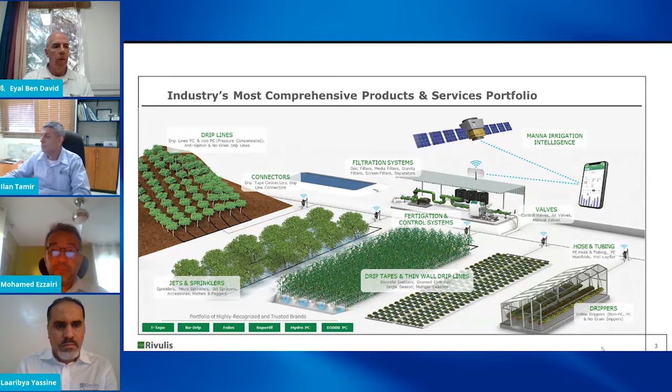The project solutions, or what we are manufacturing, are addressed to all what we call row crops, starting from orchards to vegetables, and I can add to this list most crops like alfalfa, which is more and more representing a big part of projects, or simply of drip activities in SDI.

Of course, we also do projects and have products adapted for corn and for sophisticated greenhouses or glass greenhouses in intensive agriculture. I will try to go fast and not go into too much detail in some slides, but please don't hesitate to ask a question at the end of the presentation for any detailed point concerning a specific slide.

As we said, we provide the full end-to-end design-to-harvest services. Of course, we are not providing harvest itself, but we provide technical support or supervision on how to conduct drip irrigation, irrigation schedules, and the maintenance of the material during the crop period, or even after.

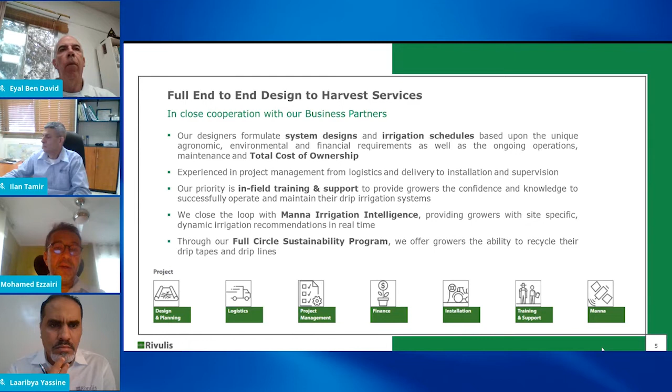Project design and planning - we design over 60,000 hectares. Of course, we design also for our partners and distributors in most cases, and we do direct turnkey projects. This concerns projects from 0.1 hectares, talking about gravity systems in some countries, or even sometimes less, to mainly - this is our business - over 500 to 1,000 hectares.

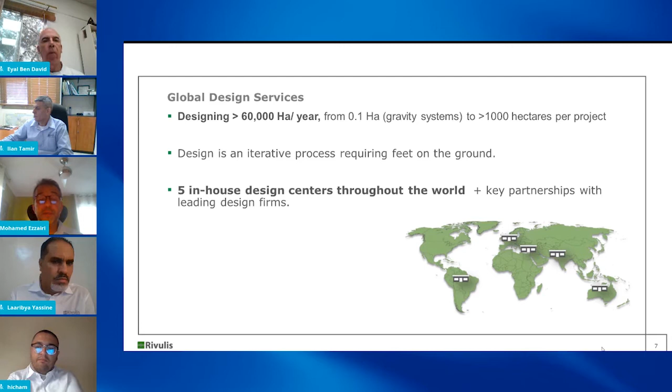We do projects up to 10,000 or 20,000 hectares in some areas, mainly sugarcane or other industrial crops. Of course, the design is done with exchange of information with our partners or our team, located in most countries, working with our design centers.

I missed one - we have 5 design centers in total: South America, Europe, Israel, India, and Australia, with thousands of designers close to our partners or close to our customers. In addition, we have what we call irrigation solution managers and agronomists also close to us, checking solutions with our partners and the end users.

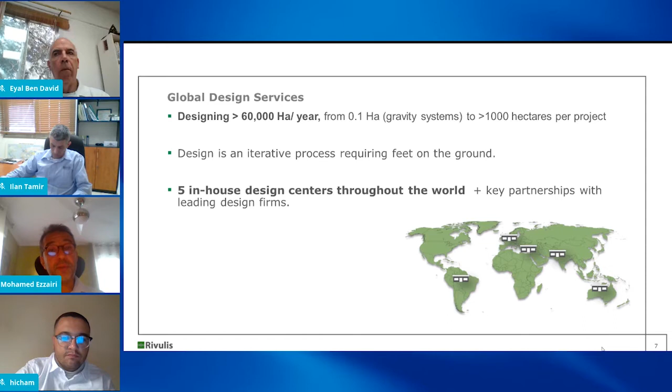So this required, to go through a successful turnkey, agronomists, hydraulic engineering, and product managers. And in some cases, not all, we provide finance, which also involves insurance and banking expertise in some complex or large projects, requiring financing from a year to 5 years in some governmental projects.

Then on-field technical support and training. We are one of the few, or even the largest, company with a very strong footprint or presence in the field. Our people are locally based in many countries, in most of the countries where we do business, and most of them provide support and training. We also have experts in our centers who train and travel to the field for sporadic training and after-sales service when needed.

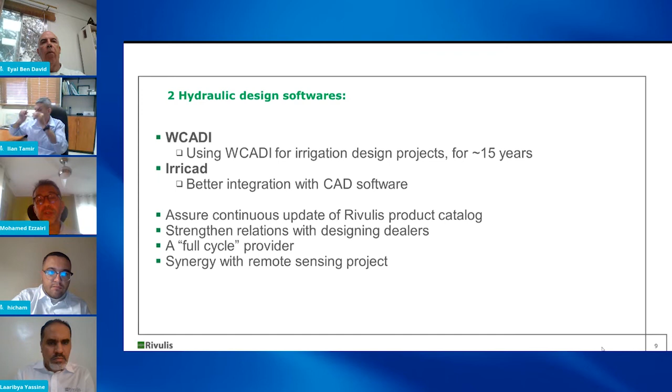About software, we won't go into details here. We work with two: WCADI and Irricad. These are the most professional software used worldwide, and of course the latest ones. They're very well integrated to make specific designs for materials like filtration, or how to manage the installation with the SDI.

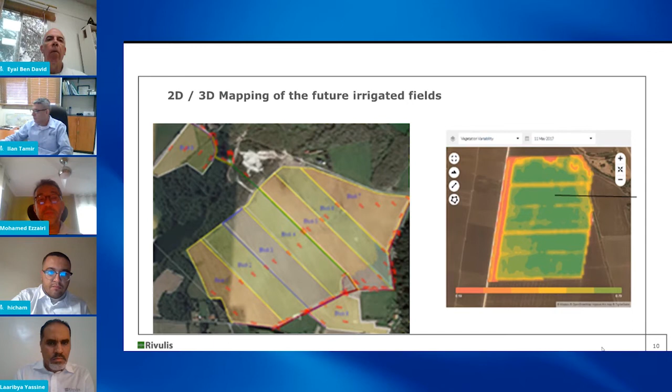If we take this map, for example, we have the hydraulic design with pipe dimensions, everything. On the right we have details of the materials and the water requirements, how to manage irrigation globally, and another map detailing the crop or irrigation management across the field, managed per sector or per block.

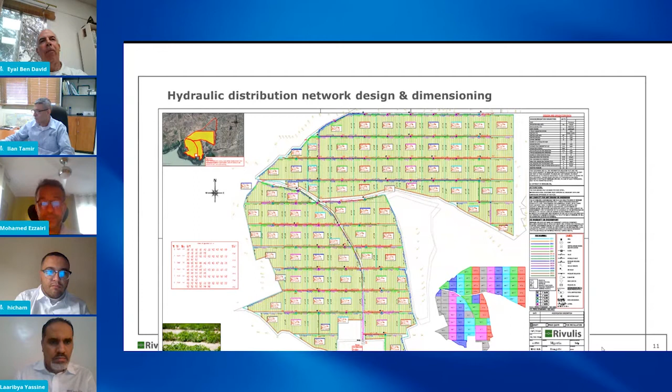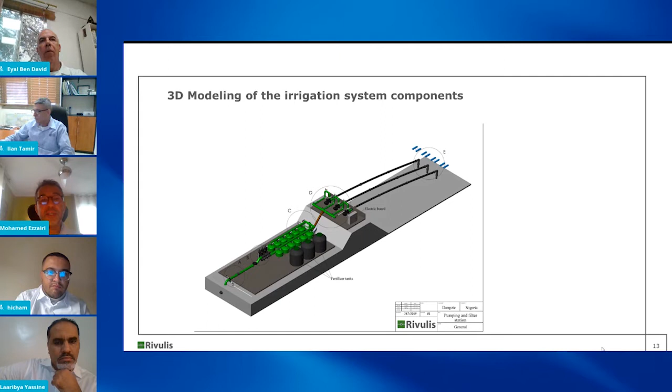At last, an example: when we have a filtration station at the head of each block or sector, we provide all the details of all components that are going to be used in the project. This step helps, generally, at the stage of installation, with the supervisor or simply with our own team during installation.

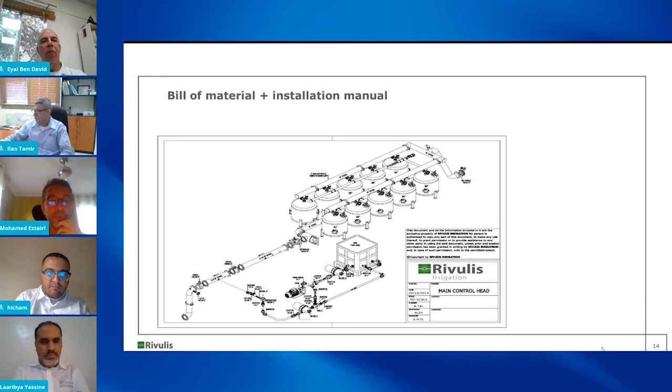I'll talk about finance, going through it fast. It's simply a kind of finance used in collaboration with an insurance company. This means that once we have the approval of the insurance company, based on financial reports, description of the project, and the pro forma invoice, this is discussed with the insurance company.

Once the insurance approves, then comes the latest stage, which is negotiating with the bank. Negotiating with the bank is actually the easiest step; the most complex part is managing to get an approved amount from the insurance company.

The key here is the collaboration and support of the end user, the customer, or the payer—providing the right documents, having sustainable activity, a good project, and visibility for the insurance to provide coverage or an amount that can be easier to negotiate with banks. With banks, we try to check with 2 or 3 banks.

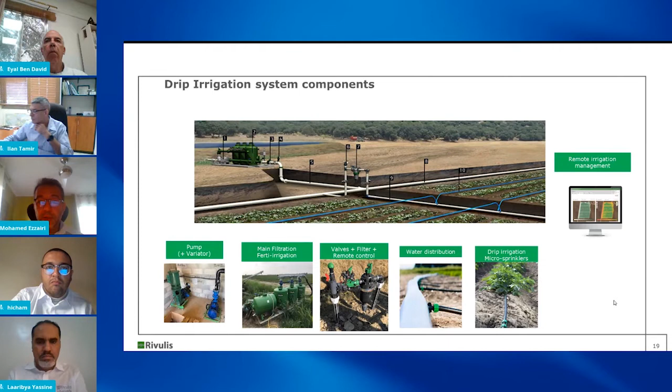So the head station or the filtration—I will not talk about pumps. As I said, pumps are the latest components that are defined from the beginning based on water availability, which can be fixed simply by the flow or the capacity of a well or a forage.

But if you go directly to the filtration, the most important part will be decided mainly by the pump's capacity, or more importantly, based on water quality. It can be mineral, or contain organic or other materials that impact the cost or quality of the filtration. As an example, if you have surface water or canal water, it's more recommended to use media plus screen filtration.

Sometimes we have what we call primary filtration at the head station, and we add secondary filtration at the field. But again, it depends on the water quality, what technique we are going to use—if it is SSDI or not—and what kind of maintenance we are going to provide.

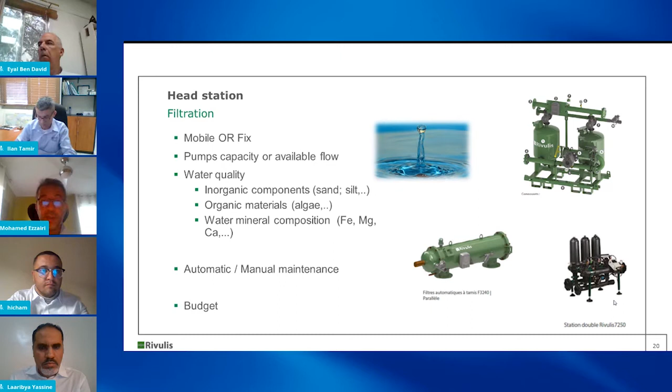Fertigation is the second part, depending on the crop, the value of the crop, and the system or technique used—whether for greenhouses or not. It starts from manual or Venturi systems, and ends with big, sophisticated fertigation machines used for greenhouses or high value crops to provide precise fertigation. Of course, we can combine both fertigation and irrigation, making everything automatic, assembled and located in one head station.

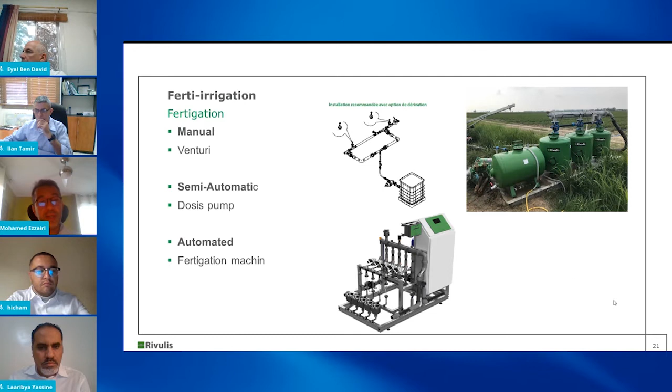Valves are the third component, coming just before the manifold or the irrigation block. We have different kinds of valves used in the field depending on the design and the constraints we face—pressure reducing valves, pressure sustaining valves, or simply on-off valves. In some cheap markets, which is not the best solution we recommend, we can also have simple manual valves, like ball valves or basic plastic valves.

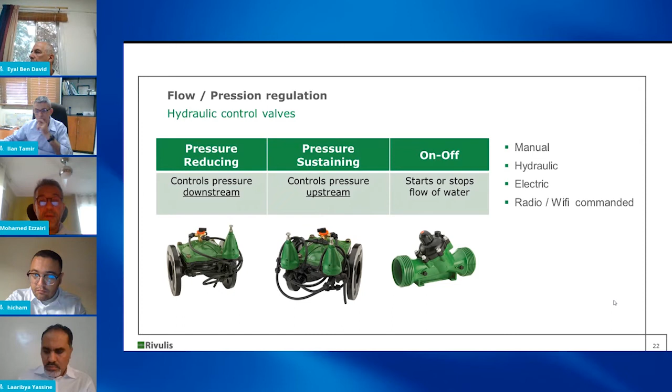Drip tape or drip line is the last component of an irrigation project. Of course, I'm not talking here about sprinkler or micro sprinkler, but it can be similar when we talk about distribution. And how to use them, or the choice of drip lines, depends on too many factors.

We will not go into details here, but just to give an idea, most systems can work for most crops, but as an example, we can technically use tape on orchards if we want—but economically it's not sustainable. This means the technical solution must fit with the economical and financial solution to make the investment sustainable and to have the right return on investment for each crop.

If we talk about vegetables, we are more willing to use drip tape, since at the end of the season we can remove and recycle the tape, avoiding the retrieval of hard drip lines to put again on another surface—which costs more at the end of the day than the cost of the drip lines during the season. This means that for every crop or cropping technique, we adapt the kind of distribution water material, drip line or drip tape, that we are going to use.

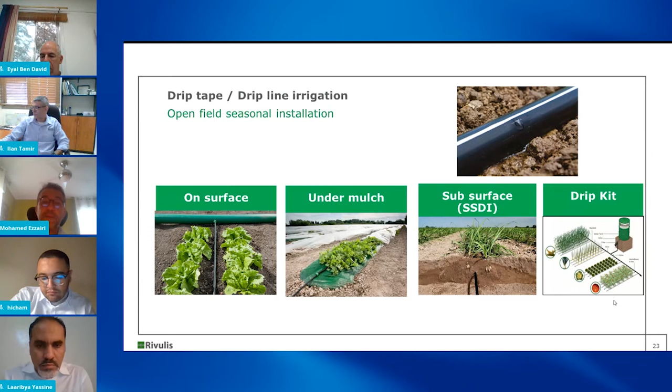At the end, the drip kit is an important part also, for small, very small growers not using a pressure, not using pumps. We have drip kits starting from 100 square meters to half hectares. Of course, from half hectares, we also do kits, but these kits require a minimum pressure of 0.4 bar to 0.45 bar. It can be with gravity or with small or solar pumps that we offer in some markets.

Depending on the kind of drip lines and depending on the crops, we have different products for orchards or for permanent crops, but also for crops like alfalfa, where more and more we use SSDI drip lines. Of course, we can also use tape in this kind of crop, but it's not sustainable economically—we won't remove the tape every season when it comes to orchards. So we prefer a permanent system, sometimes buried, what we call SSDI, rather than thin products. And in these products we have a big range of specifications.

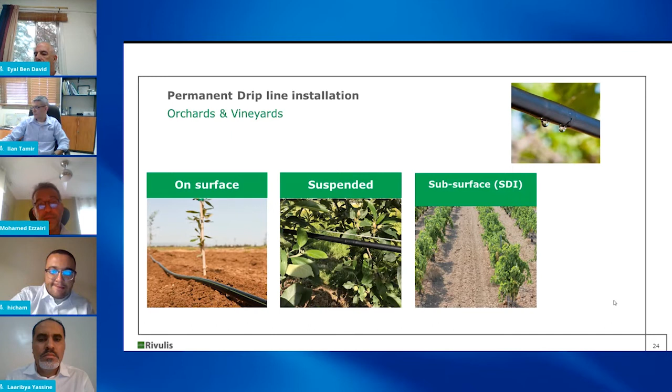I didn't talk about micro sprayers, what we call micro sprinklers, mini sprinklers. We do that—we are large manufacturers. They can be used, designed for irrigation, used under the canopy or over the canopy as an anti-frost system, depending on the use. It can also be combined with drip irrigation or tape for some greenhouses or specific crops against frost, what we call the anti-frost system, in some crops like orchards—some kinds like avocado, for example, or other orchards.

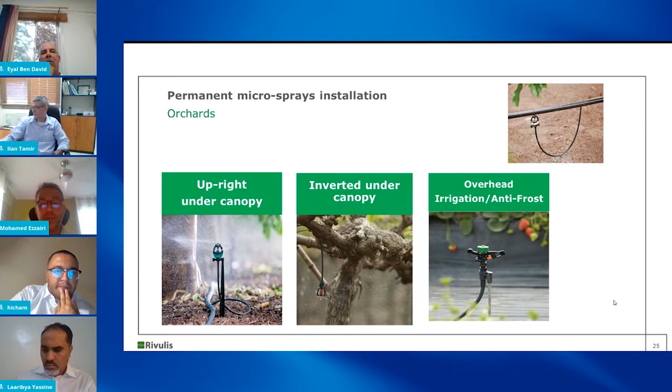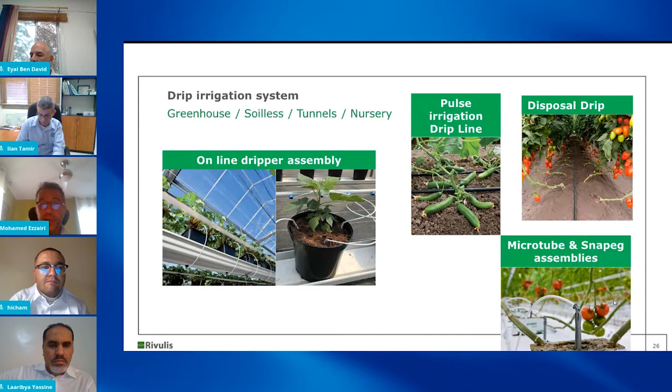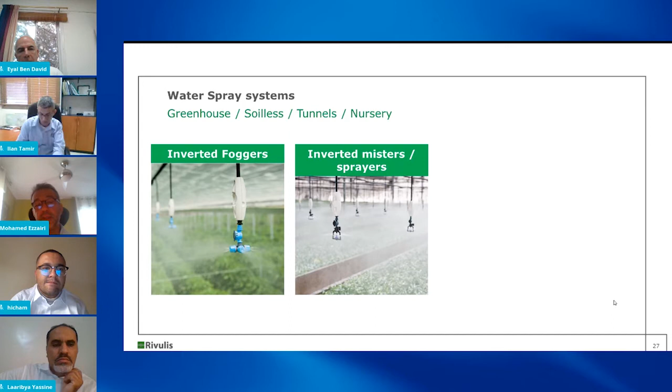The other part of the turnkey project in general is logistics and purchasing—it is also one of our strengths. Our company now has not 15 factories anymore, it's 16 factories covering most continents, all continents by the way, with some distribution centers close to the company or close to the countries. Of course, it makes delivery and supply easy to manage from a logistics point of view, with fast deliveries.

Again, I'm not saying all factories manufacture all products—no—but we have stock in our factories of products from other factories located around the world. Most of our factories are specialized to ensure quality in specific products. So in most factories we have several different products, and of course agreements with some partners for things like pumps and pipes, to deliver as fast as possible from our locations.

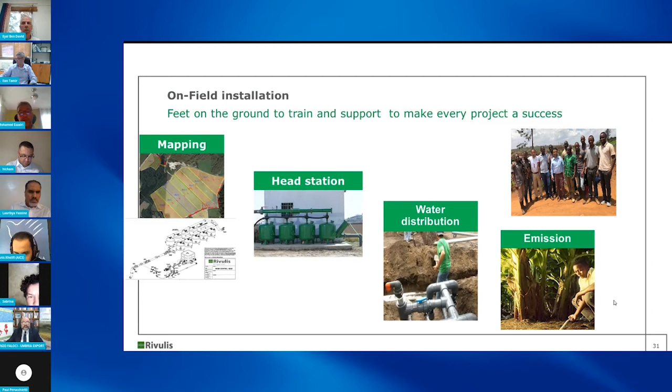Installation of drip or retrieval when it comes to tape, for example, at the end of the season. We provide training, and we also provide materials or machines for installation. We are not manufacturing ourselves; we have specialized professional companies doing that, so we work with them in general.

In large projects, the end user already has this kind of materials, and what we do sometimes is just supervision or adjustment of materials depending on the products we are providing. If it's tape or drip lines, sometimes it requires adjustments, and we handle this with our customers. In the worst case, we also provide adapted installation machines and retrieval machines and equipment, which is also important.

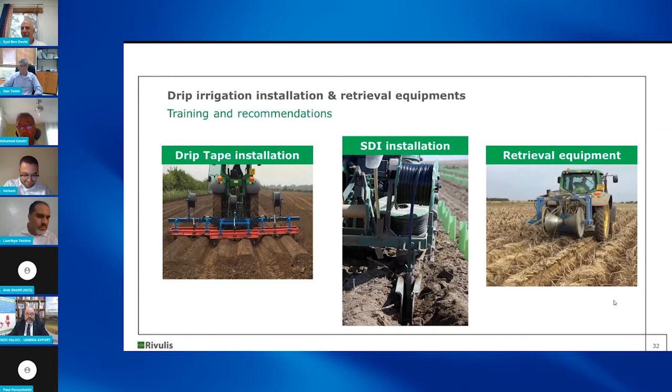We are not leaving the product in the soil. We don't want our partners, our growers, leaving plastic and drip lines in the soil at the end of the season. So retrieving can be manual for small surfaces, but must be mechanical for large surfaces. Here we recommend some suppliers, or we supply this kind of material ourselves.

Training, management, maintenance - as said before, we provide maintenance. We provide guidance on how to manage irrigation based on the crop, which is very important. It's very good to have a sustainable irrigation system, but it's better when we know how to optimize it.

The target is not to over-irrigate, but simply to provide the right quantity of water at the right moment, into the right period of the crop. It's not easy in some cases because it cannot be generalized - it must be customized based on the field, based on the soil, based on the crop. Part of managing this is the subject we talk about.

Manna irrigation system, which manages irrigation by satellite, and we also base it on the database. It's not only satellite, it's also soil, it's a lot of things, but we use the term satellite simply because we have a picture of your field every 2 days, and this provides a rough idea, but precise, of how your field is looking.

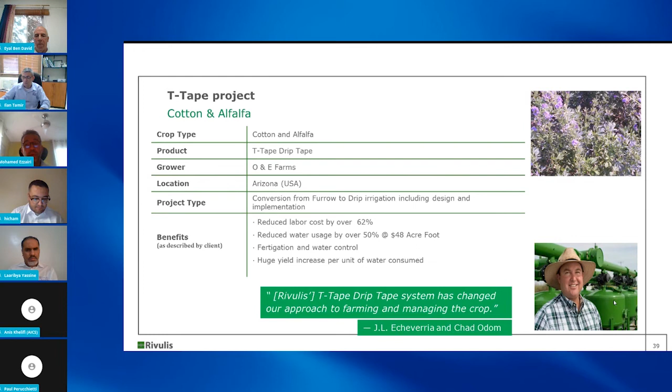We go fast in some projects, yes. Alfalfa, cotton in the USA - we did some big ones, and more and more in alfalfa now, and in Australia also a lot of projects that we have in alfalfa. We start to do also alfalfa projects in Africa.

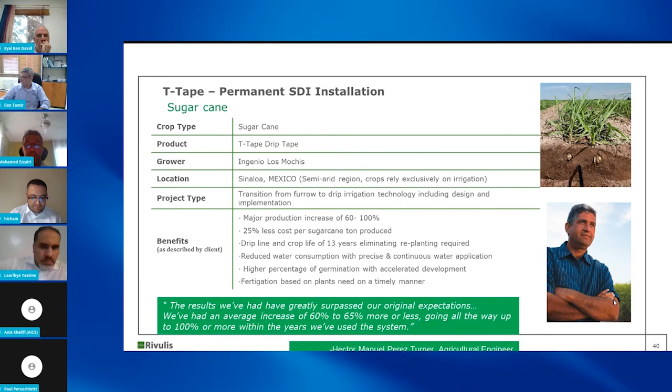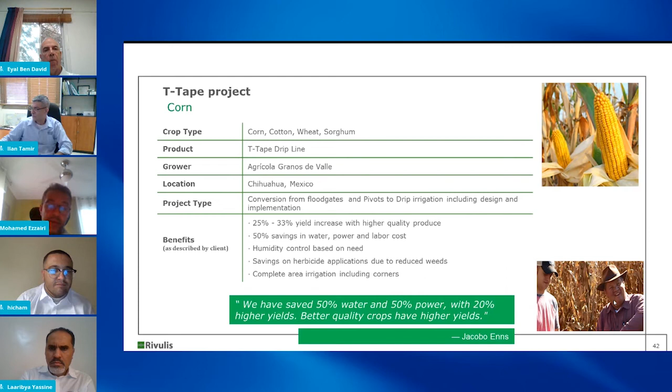Here it was a project with Monsanto with the D5000, also in corn seeds. We work with them in North America and also in Europe.